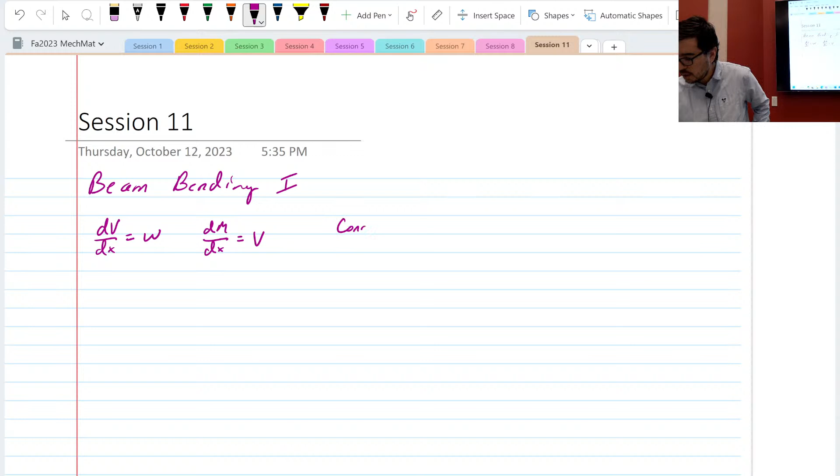The second equation is dM, so the change in the internal moment, and how that relates to the internal shear force. And then we have a concentrated force F, and that can be related to a step change in the internal shear force. And we also have a concentrated moment M app, and that can be related to a change in the internal moment.

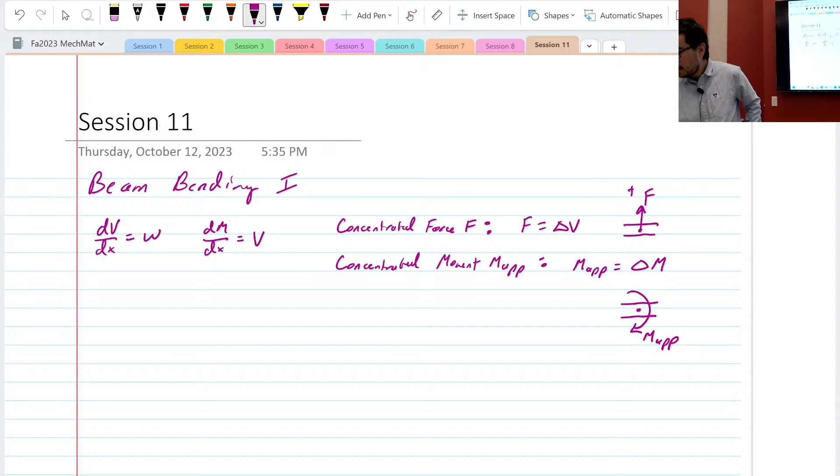Just a couple of things to note here. We do have a convention. That's in the notes, I won't go through it in detail. But a positive F, if you're going along the beam, is up. That's positive F. This is counterintuitive: a positive M app is actually negative, right? By right-hand rule, that's going into the board.

Now, I have a question for you. When we say right-hand rule, I was talking to someone recently, and people were saying that we don't use analog clocks much anymore. So when you think right-hand rule coming out of the page, and someone says counterclockwise, do you think of a clock first, or do you think of the right-hand rule first? Because we don't use analog clocks much.

Clocks. Okay, so some people still use analog clocks. Okay, that's good. All right, just checking. All right, but some people, it's fine if you think right-hand rule.

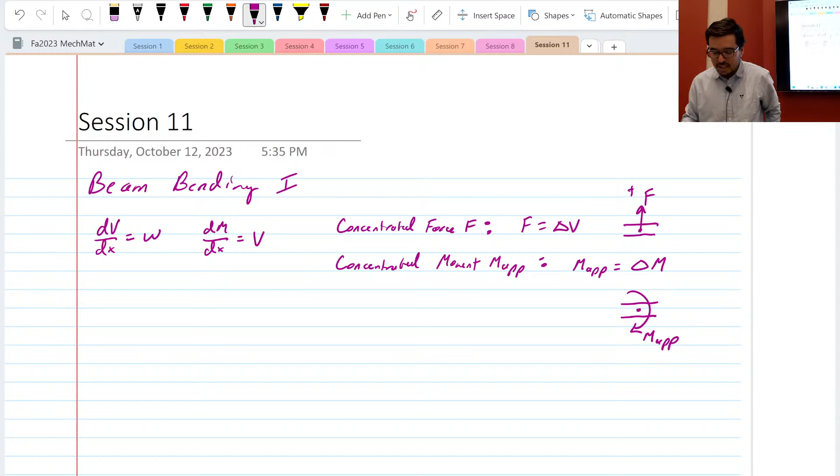All right. Okay, so there are a couple examples that I'd like to do that kind of share a little bit of a process that you could apply here. Now, there are a couple ways you can do these problems. One is you go old school back to statics, and you just do it like you did in statics, which is method of sections. But what we're trying to show is that there's kind of another way that uses these equations that we've just described, partially. They're not partial derivatives, though.

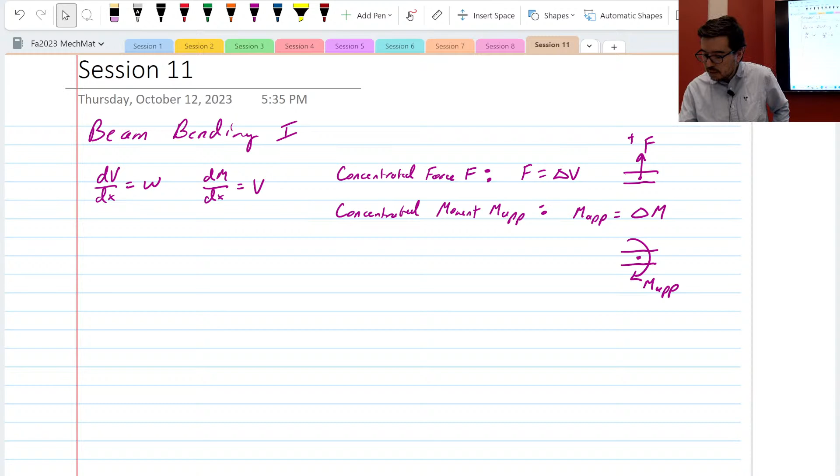Anyway. No joke. All right, so we use what's called a graphical method. Okay, graphical depiction. All right. So let's see about this problem. Okay, this is L. This is L. This is a wall. All right, that's our beam.

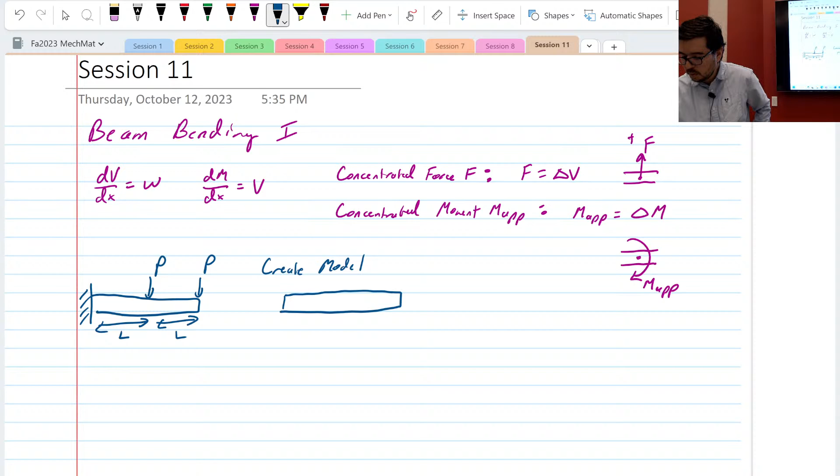So step one, with either of these techniques, it's not bad to create a model. All right, so what's the model look like? Typically, this model is going to be something that we use for external equilibrium. All right, so I'm going to go ahead and put the external forces on here. And then I'm going to look at the constraint and say, I'm going to have a reaction force, and I'm going to have a reaction moment. And I'm going to call this reaction moment MR. Okay, reaction moment.

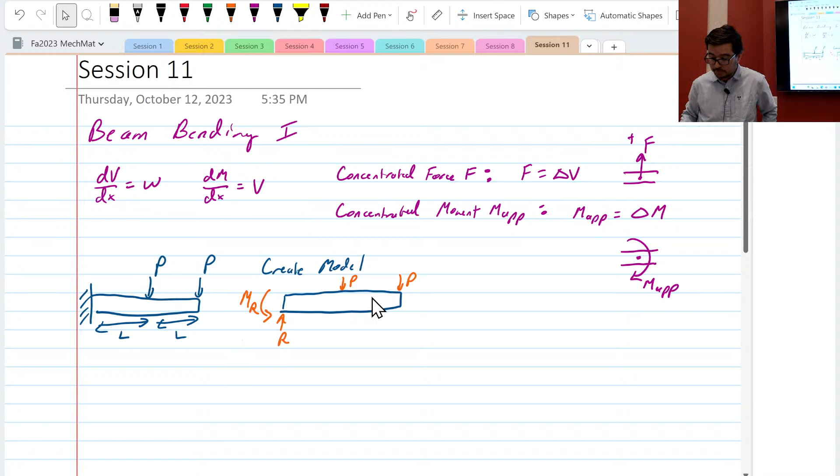Here, there's no convention being employed at this point. So we are looking at picking an R and an MR that should be convenient for us. Okay, so MR is in the counterclockwise direction, and that should be opposing what is being applied by these two external forces, P. Then another thing that's often good to do is external equilibrium. So let's look at external equilibrium.

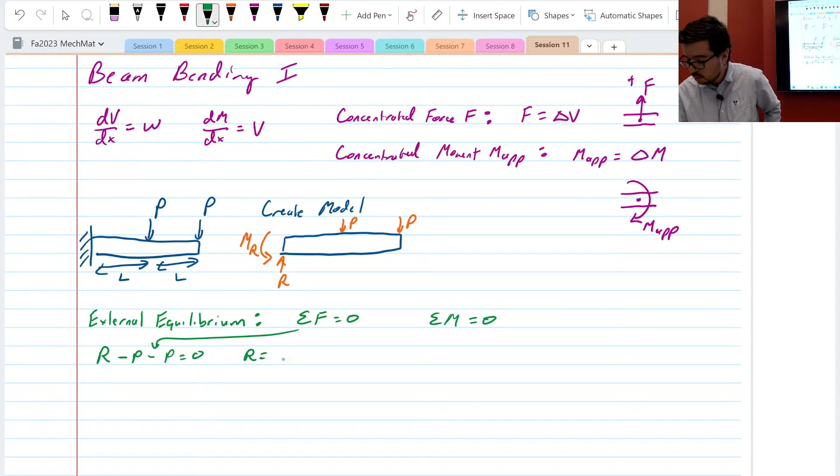Okay, and if we do this, we're going to look at the sum of the forces being equal to 0, and we're going to look at the sum of the moments being equal to 0. Okay, so sum of the forces for that, let's say that we have positive R minus P minus P equal to 0. So R is equal to 2P. And for the sum of the moments, let's pick a spot. We'll pick it right here, A. So we're going to do the sum of the moments at A.

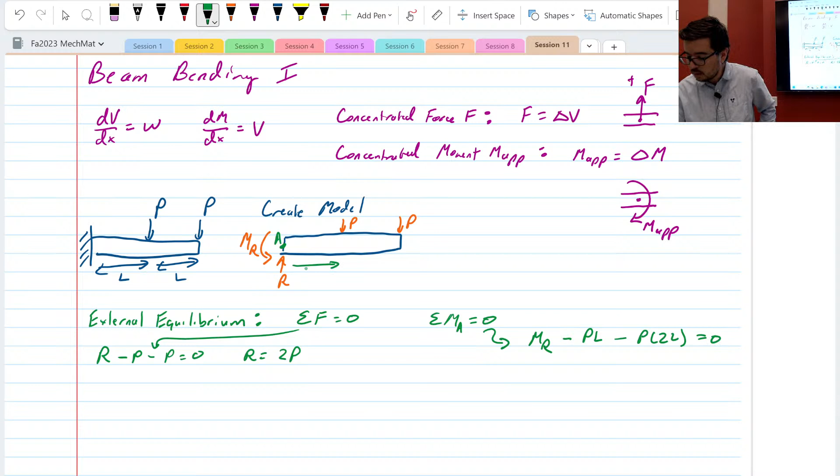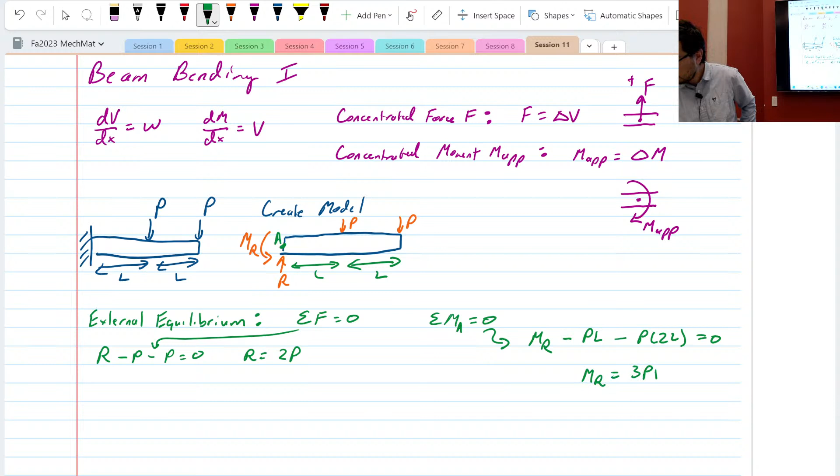And that is going to give us a positive MR, okay, and a minus PL and a minus P times 2L equals 0. Okay, because this distance here and that distance there is L. Okay, so MR is equal to 3PL. What do we do at this point?

Well, we can begin to think about what's happening at the ends and boundary conditions as we employ a graphical method. So let's say we want to do a graphical technique. Okay. So it's not bad to just go ahead and draw a couple of graphs that are blank, like this. Whoops, what am I doing? This is X, this is V, this is M, okay, like that.

And now what we can look at are boundary conditions. So let's look at the boundary conditions. What does that mean? That means that you take a little sliver at the left or the right end of the beam, okay, and think about what is happening just inside the beam. So you just moved a little bit away from the boundary, from the constraint. So in this case, if I look at the left side, I've got this little chunk, that's a cut. I have my R over here. I have my MR over here, okay?

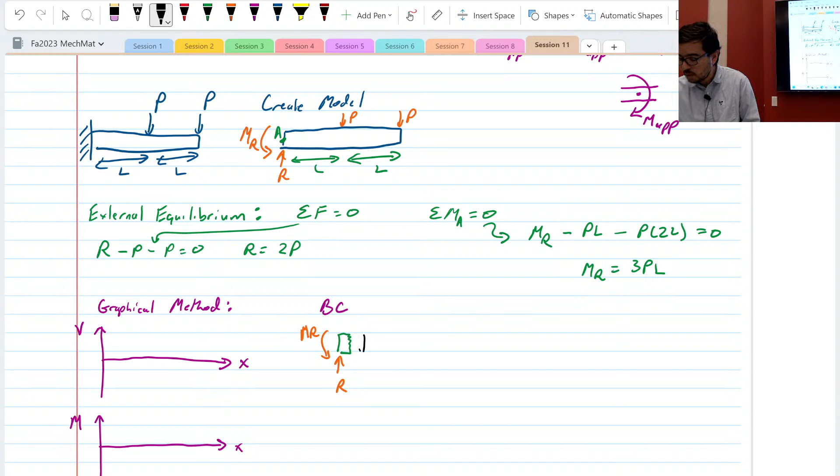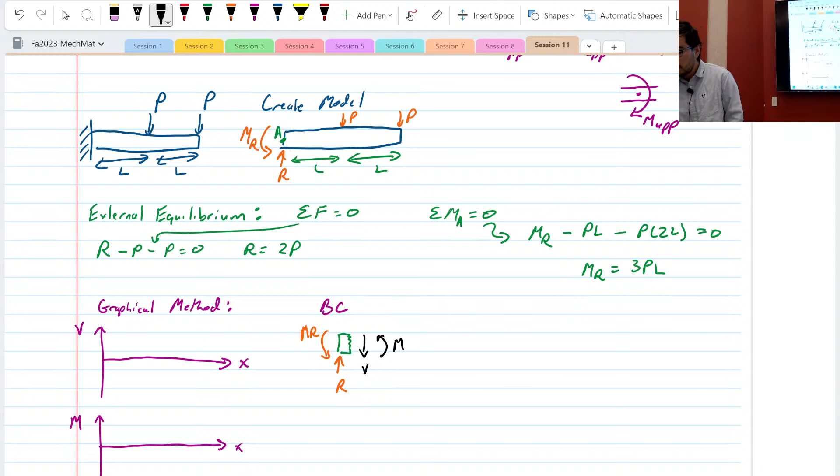And I've got my internals, and these do follow the conventions, okay? So what is it here? I have an internal shear force down, and I have an internal bending moment that's helping make it smile. Okay, so I already calculated out R and MR from external equilibrium, all right, they're right here.

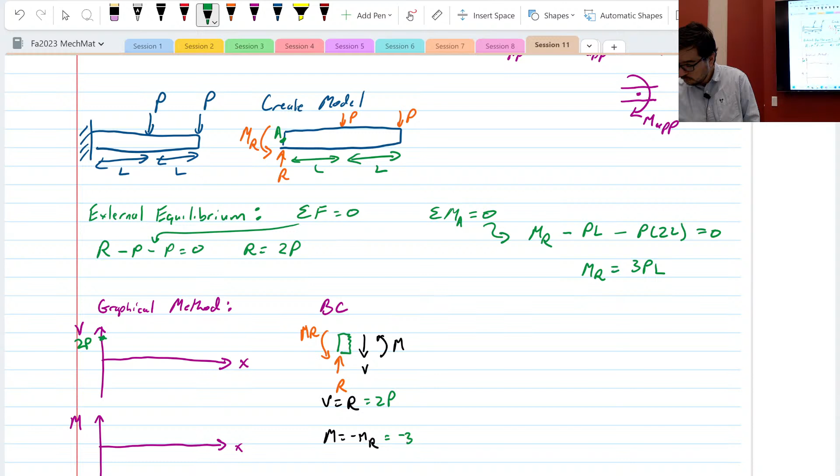And so what this means is that at the left side, V is going to be equal to R. And also that M is going to be equal to minus MR. So what I do is I go over to my plot and I'm like, oh, well, V equals R, that means that V equals 2P. And I'm going to say this right here is 2P. Right there. And M is equal to minus MR, so that's minus 3PL. Okay, and I'll put it down here.

Okay, so I've got these points now. What do I do? What do I do? Well, this is where I employ the equations. I'm going to use a different color just because that's fun. I have dV/dx is equal to W. Okay, W is a distributed force. All right, transverse, there's none, okay? This W is equal to 0. So what does that mean? That means that the derivative of V with respect to x is also 0.

What does that mean in terms of the geometry, or what I'm graphing? Yes? Yeah, it's constant, all right? And I know there's another something happening at L, so I'm going to draw that constant only up to the first L, okay? Because we're going to go to 2L in this particular case. So up to this point, it's flat.

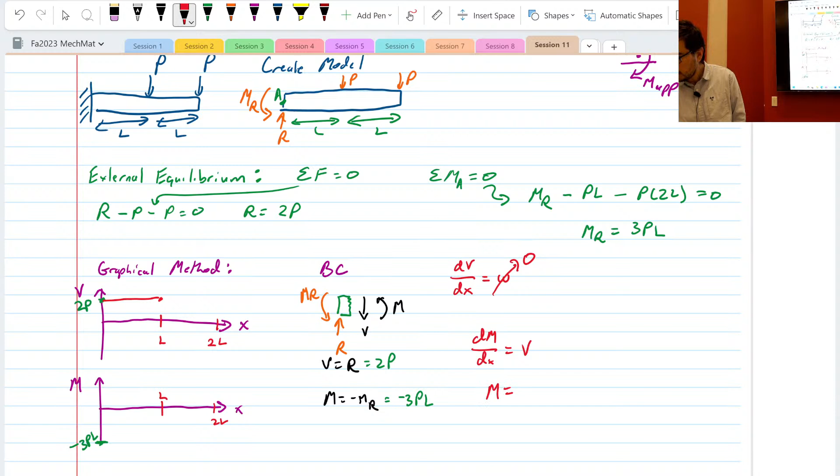Now, let's write the other equation that is often useful. dM/dx is equal to V. So that means that M is equal to the integral of V dx, okay? And V is a constant. This is a constant 2P, at least for the first region, for the left portion. Okay, so what does that mean?

That means that I have a slope, right? So this is a flat, and now I have an integral of a flat line. That's going to be a first order line, so something with a slope, and I know it has slope 2P. If I go to L and I have a 2P slope, that means I'm going to go up 2PL. So at this location, I'll be up 2PL, which means I'm at minus PL. And I get to that location, and it's a nice line. Okay?

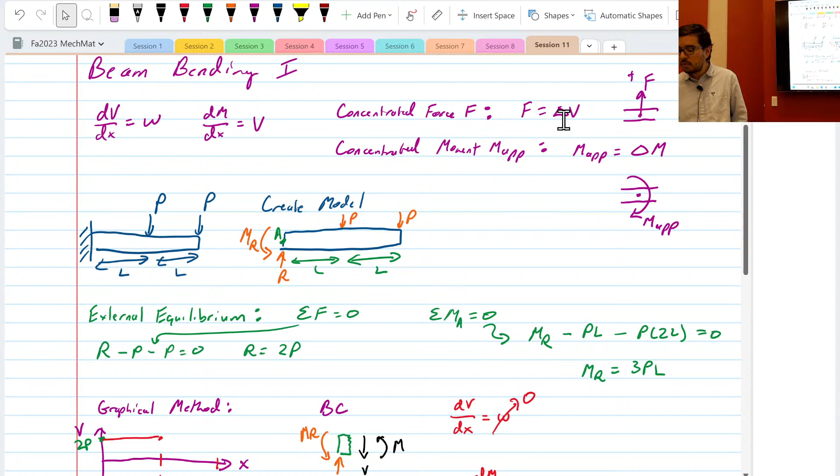Now, what do I do once I've gotten here? Well, I get scared. What am I supposed to do? Well, let's look. I've got this other equation. If I have a concentrated force, then it's equal to a delta V. That concentrated force can be in the form of this P, but it's in the opposite direction as this positive F. So that causes a drop, a delta V of P at that location. So I go from 2P down 1P to P. So now I'm at P.

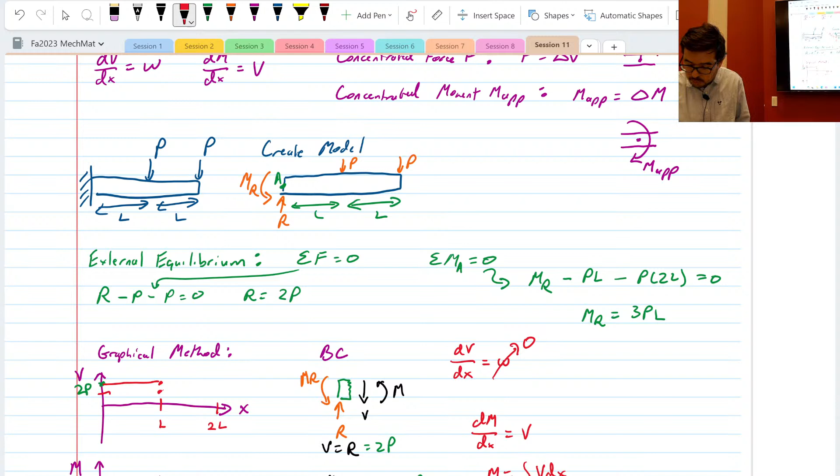And I go back to this equation, dV/dx is equal to W. W is still equal to 0. There's no distributed force in that region. So that just stays constant. So I'm going to end up at P. Another flat line. Okay? So that

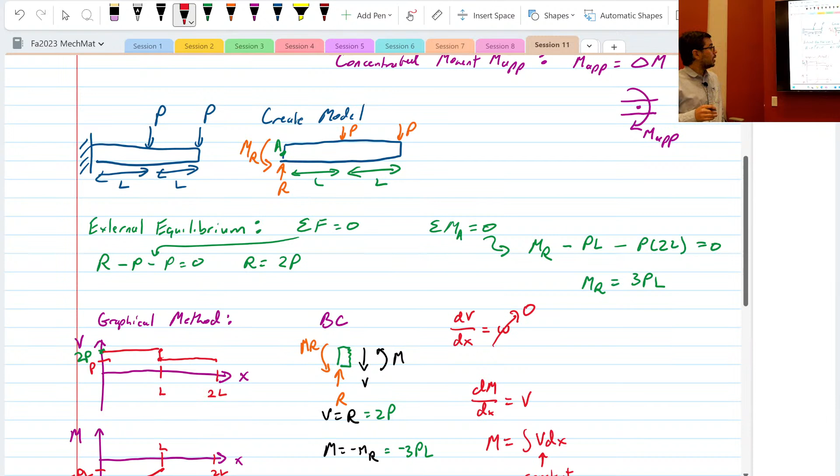graph is done. And if we were to look at the boundary condition on the right side, what do I mean by that? If I were to do an internal slice on the right side, extra, read all about it, I've got this P going down. Now I've opened up this side to the left, which means that by convention, because that's internal, this is what it should look like. Guess what? V equals P on the right side. We've satisfied that boundary condition.

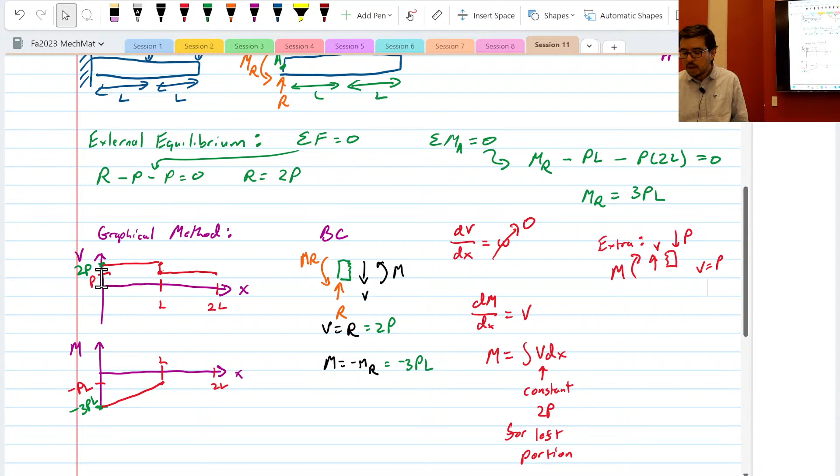What's going on over here? This one's a little more complicated. I have a step change in height, but I don't have an applied moment, a concentrated moment. So I don't have a discontinuity, I don't have a jump, all right? But look, the slope has changed. It went from 2P to P. So what do I do with that?

Well, now I've got a slope of P, and I'm going another L. That means I'm going to go from minus PL with a slope of P over a distance 2L minus L, that's the L. That takes me up from minus PL to 0. Like this, and we'll just do it in a different color. So we end up at 0, and the slope is less. It's P instead of 2P, just like that.

And once again, extra, read all about it. We have this boundary condition that we can look at. What is M? Well, there's nothing on the right side. It's 0. So M is equal to 0 on the right.

Okay, which means we're satisfying that condition as well.

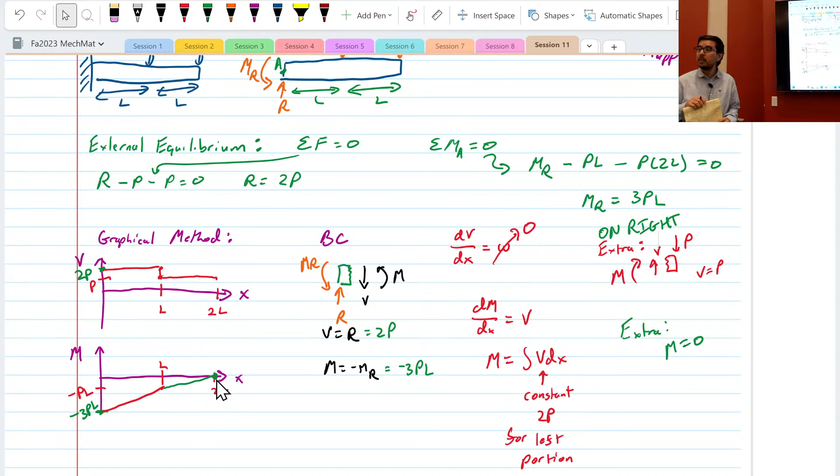So do you want me to do another one of these examples, or do you want me to be quiet? Kevin asked: could you explain one more time exactly how you split up, or how your method of sections determines the reaction force, and how you're able to model both the shear force and the shear moment?

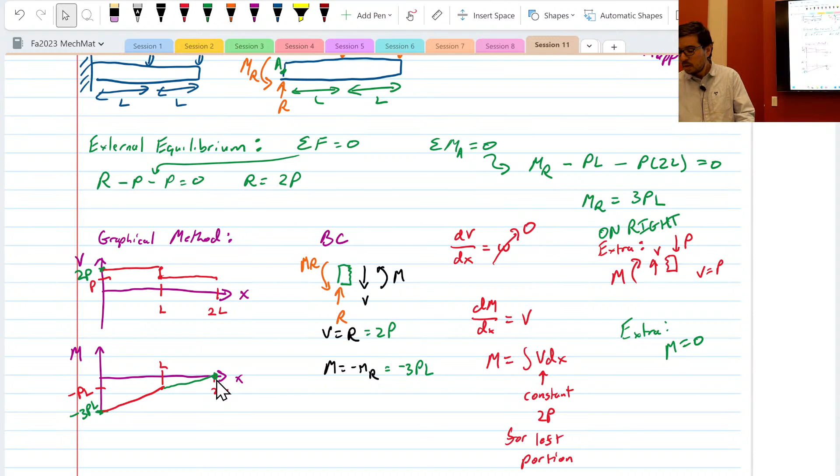I'm a little confused on why M is equal to negative MR, or more specifically, why... Yeah, more specifically, why it's important to model it. Okay, because look, I might have skipped a little thing here, right?

When you have this equation dM/dx equals V, or you have this equation dV/dx equals w, or omega, you've got to take the integral of both sides. But this is an indefinite integral, so it has a plus C, a constant. We don't know what that constant is. That's why we have to use a boundary condition.

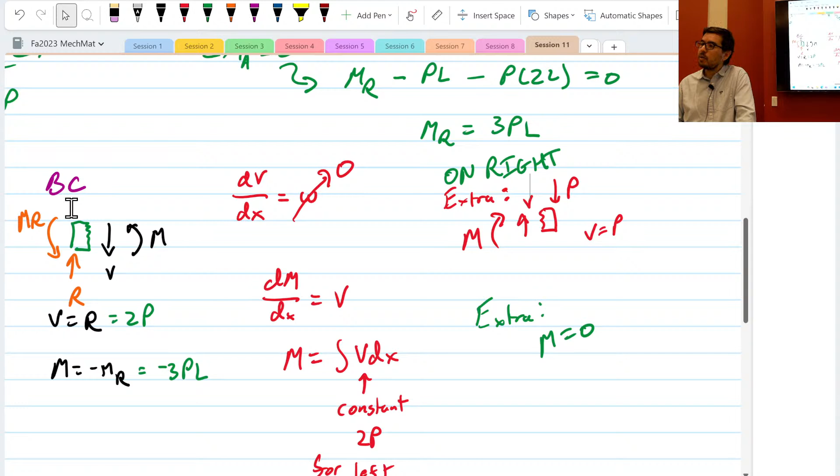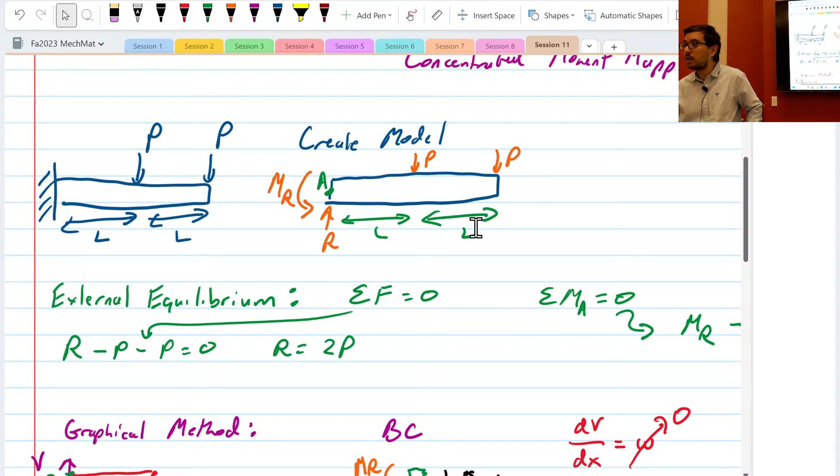So we had to use the boundary condition, and the simplest way to use it is to look at what is happening internally just next to the left side, or just next to the right side. Because I already solved for external equilibrium, which tells me what's happening at the left side and what's happening at the right side. So that's why we're looking at what V is, and this is a BC at the left side.

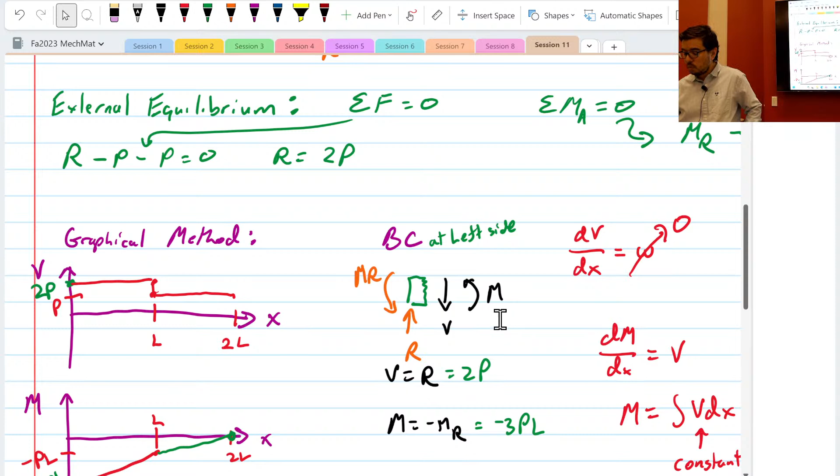My little squiggly right here signifies that I've cut it right there, using the method of sections, and there's not much distance gone from here to here, so I can essentially say R is V and M, or however you want to look at it, plus MR plus M is equal to 0.

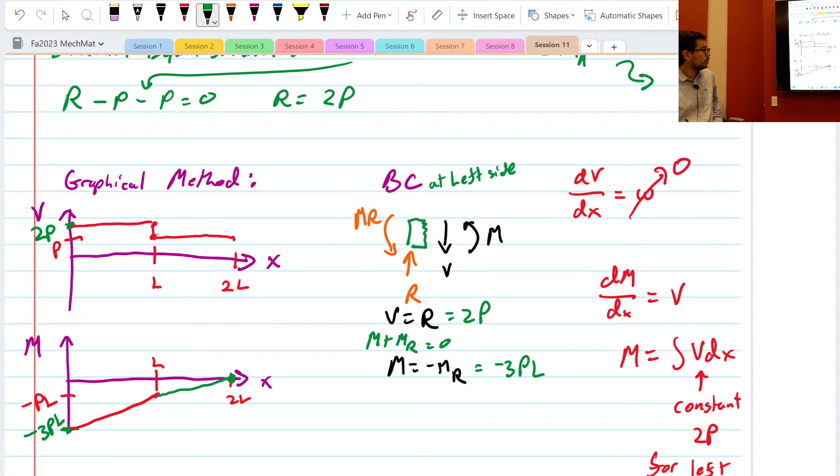So in this situation, from the boundary condition, you determine the direction of M just from the diagram? Yeah, just from the diagram. But that's it — you get the magnitude of M from the integral.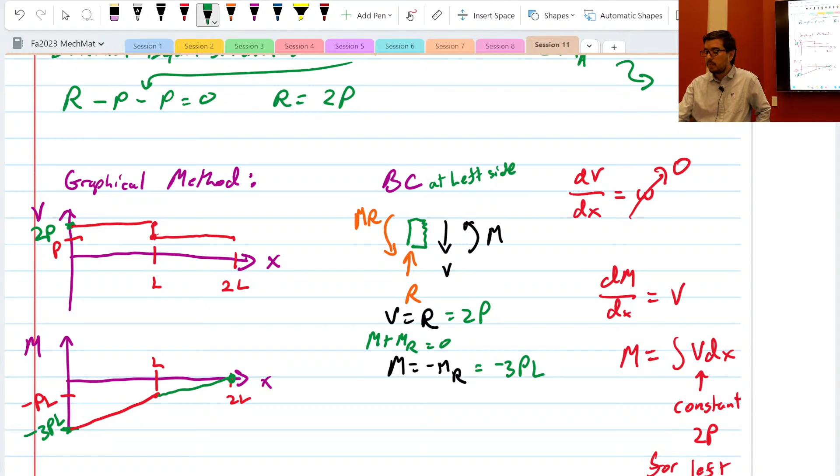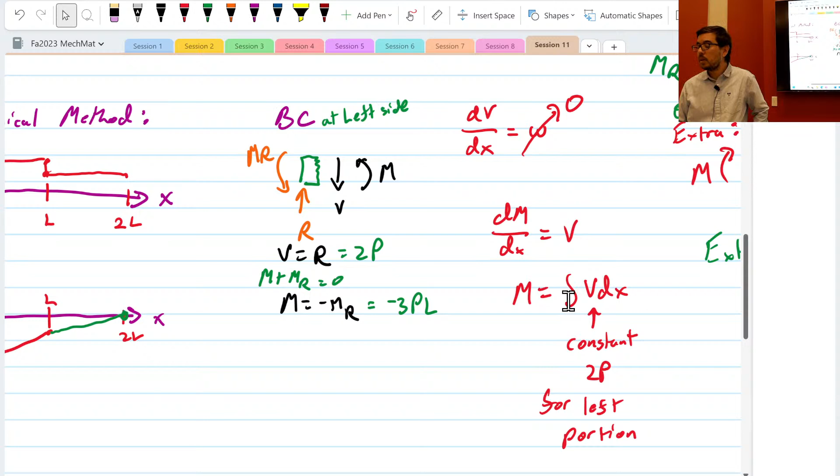If I'm using purely graphical methods, I get the derivative from this expression. But if I plug in the boundary conditions, I can actually solve for this expression and get the actual expression for this part of the line.

But it's a little bit dicey, because sometimes if you start from the middle and go to the right, that gets a little bit tricky, because you have to account for where you're starting again when you solve for these intervals.

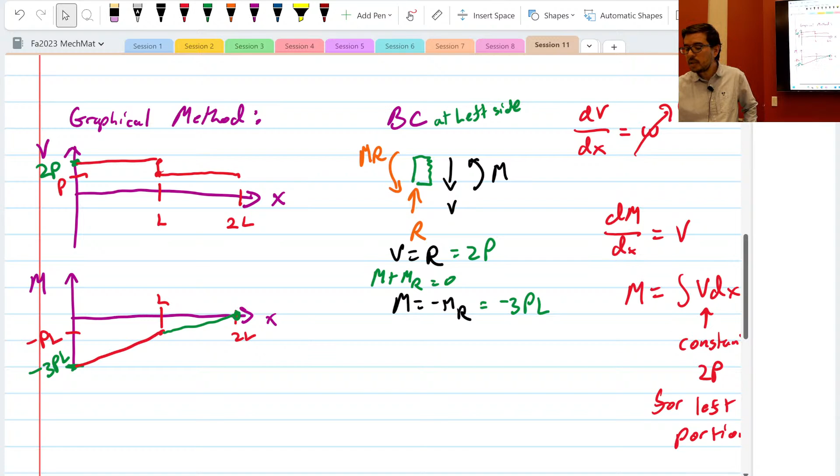But the point is, one of the points is that these two equations allow us to figure out what the slope of V and the slope of M are as we go from one region to another, until we hit another constraint or another external load.

Do you want to do another example, or do you want to work on your homework? Work on your homework, okay.

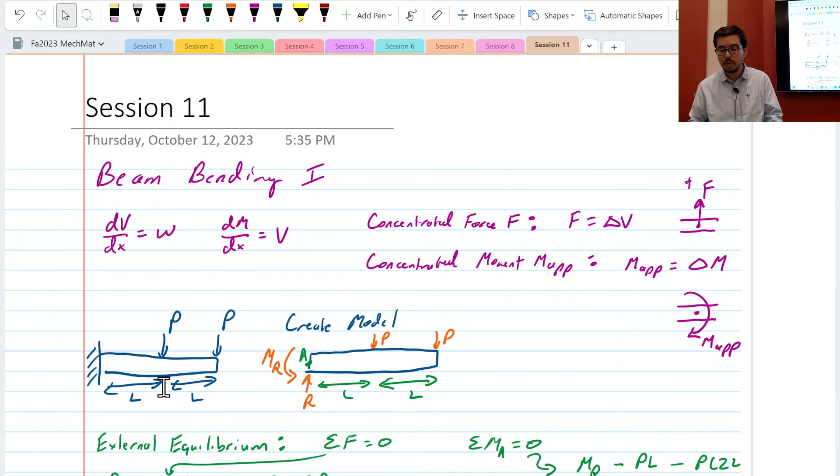The other example is pretty much done in the notes as well, but maybe a little faster than I did this one — actually it's quite a bit faster. But it's another example, if you're interested, that we skipped.

So, an example to chew on, to think about.

I don't like ending a phrase with a preposition, but anyway — it's this example where you have a setup like that, and there is a moment applied in the middle.

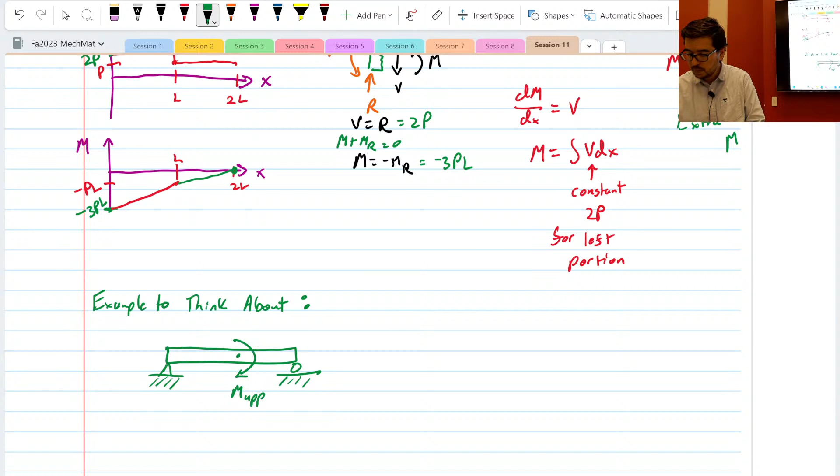Okay, all right, I'll go around. Praj, you're here, right? Yeah, Praj is here, so we'll go around and answer questions on things. All right? Good.

What's that? Okay. This is not a pen that's useful.

Are you out? You out? You got questions? I just studied.

Right, so... all right, good.

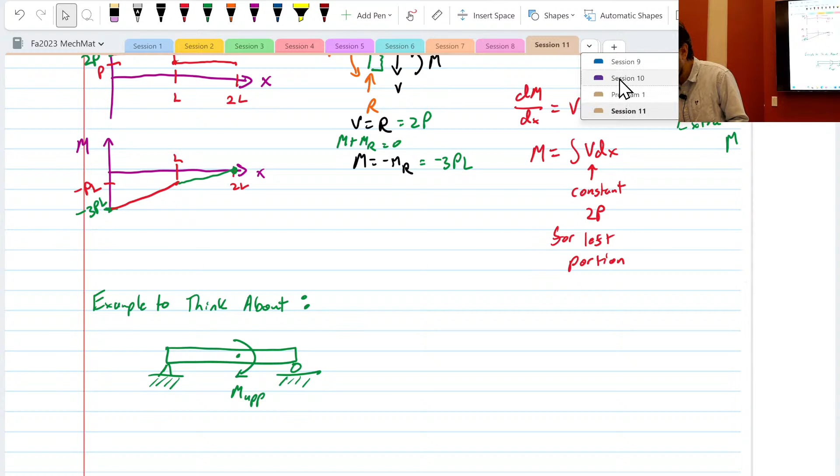Okay, there's a question about PrePoMax. You're given the shear modulus, right? Is this question number 7? Okay, so this is PrePoMax session 10, question 7. All right.

When we give the shear modulus, okay, but most FEA packages don't say what's the shear modulus. What do they ask for? What are the open boxes for PrePoMax? So the FEA package wants to know elastic modulus and Poisson ratio. It also might have wanted a density too, but at least it wants these two, right?

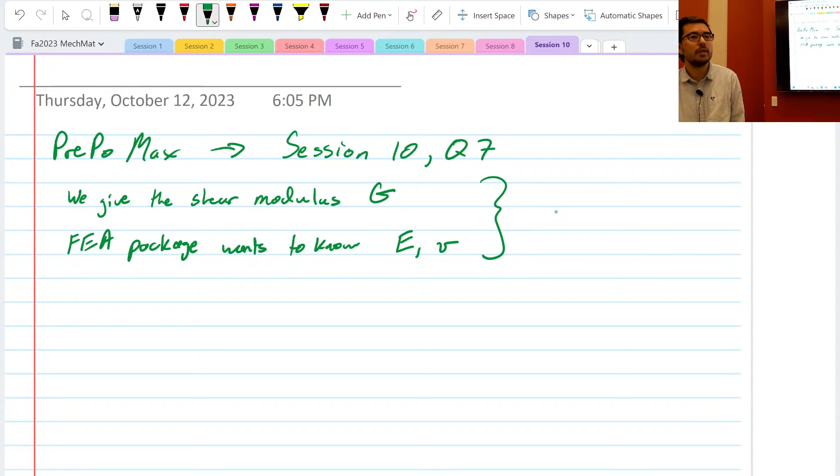So what's the relationship between these? What's the relationship for an isotropic linear elastic material? Yes? Right? That's the relationship.

So you're like, well, wait, so what do I do? Because you didn't give me a Poisson ratio, you didn't give me elastic modulus. Just pick one, all right? So just pick something 0.2 to 0.4, right? 0.3 is a good option. All right? And then figure out what the E is associated with this and do the problem.

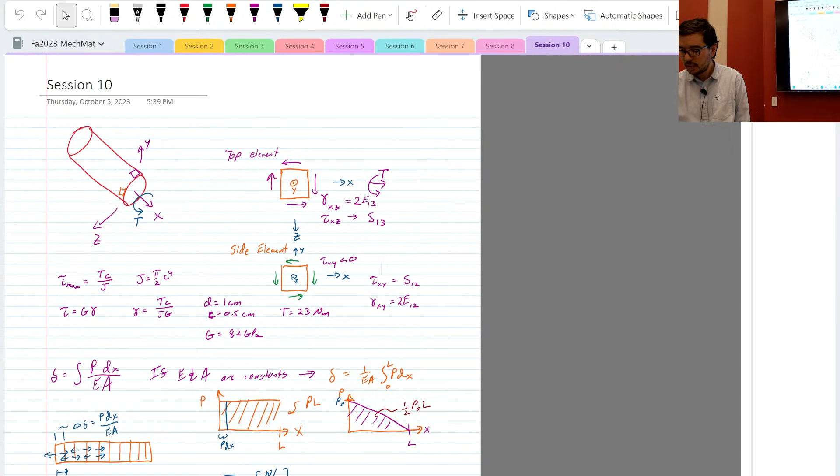Okay, all right, so look. If you go to, I tried to talk a little bit about this last week, right? It is very confusing to know which shear strain you're interested in, right? Is that the question? And then relating the tensorial shear strain in PrePoMax to our general definition of shear strain.

Okay, so first, there is a factor of 2 in the magnitude. So if you're looking at one of the shear strains in PrePoMax, okay, what you'll see is that you have the E's, and you're looking for off-diagonal terms. So E12, E13, E23, right? Those are your options. Not for the normal strains. These normal strains, they work out nicely. But for the mathematics to work, with the tensors and things that it's solving for, what you have is a factor of 2.

So PrePoMax, right, is going to give you this E12 value, but then you have to multiply by 2 to get a gamma XY. Okay? Does that make sense? That's for the magnitude contribution. So if you decide that you want to know gamma XY, you're going to look at E12, all right, because X is the 1, Y is the 2. You're going to look at E12, and then you're going to multiply by 2 to give you your gamma XY.

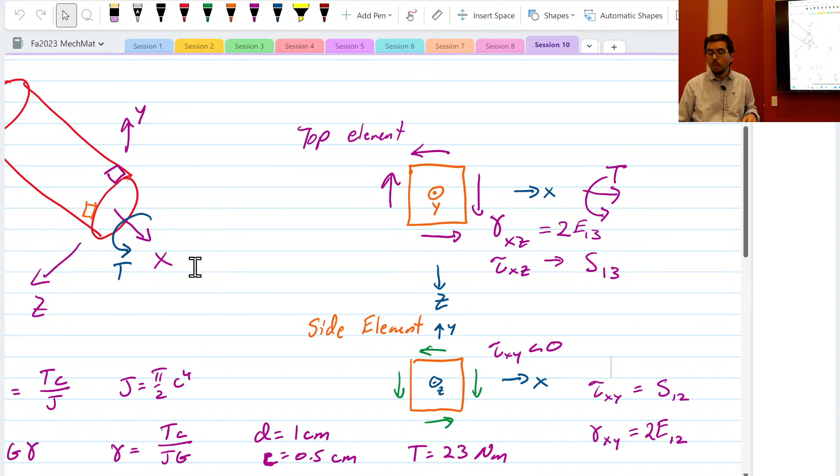But this is negative, this is downward. Why is it downward? It's because, we've talked about this a little bit before, if I were to draw a rectangular grid, first I have a rectangular grid that's really nice. Well, that's not very nice. Okay, but then I twist it.

And let's say I twist it with a torque like this. Okay, so I've got a torque that way, and I've got a torque this way, because it's got to have a reaction torque on the other side. What's going to happen to the grid? The grid is going to go from this nice rectangular with right angles, okay, to something that looks like this. Right? So what you're seeing is that these sides have gone down, these sides have gone that way, just from deformation. That's with twisting, right?

If I had if I was a better teacher, I would have a nice rubbery thing that I'm twisting. If you want to see this in action, watch Jeff Hanson. He gets a pool noodle out, right? And he has this pool noodle, and he twists it, and you can see which direction the pool noodle is twisting.

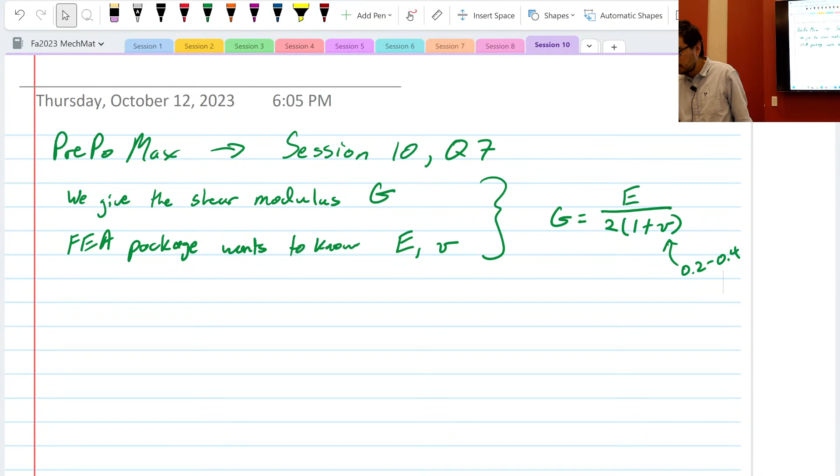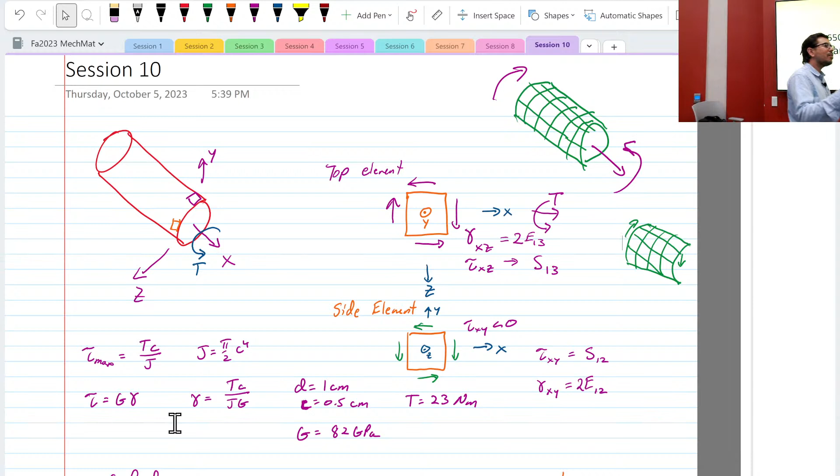So let's ask a question. In an equitable class, is there anything as extra credit? In an equitable class? Yeah, you should do it. How can there be extra credit if everyone is given the problem? You do a bonus, yeah. But everyone's given the bonus problem, and you sum all the points at the end of the semester. Does extra credit exist? Well, the people that don't do it don't get it. Yeah, right. So that's like assigning another problem for everyone to do. And I can call it extra credit, or I cannot call it extra credit, it's all the same. Yeah, but if everyone else gets it right.

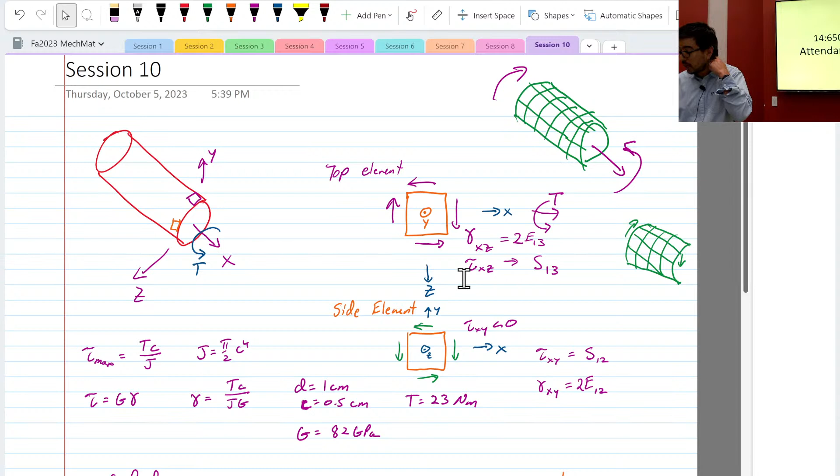All right, if anyone's still here for the video, just a note: what was asked in the problem set, I was mistaken earlier. It was actually asking for the tensorial shear strain. That's what I asked for. I thought I was asking for the alpha or the gamma, but I'm actually asking for the tensorial shear strain.